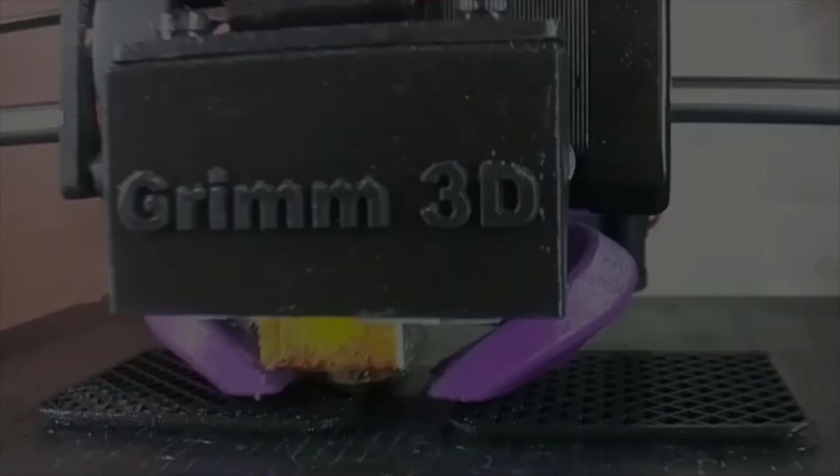So as you can see, this lighting fixture cover here is actually pretty brittle. It's been breaking quite a bit lately. I really don't want to look all over town for a new piece of plastic, and I'm not even sure that it would fit. This is pretty old, it came with the house, so it's been here a while, and it's had plenty of time to degrade and get very brittle. So today we are going to redesign this and print it out of some clear PETG, so stay with me for the step-by-step.

So I've taken the plastic out. This is actually a recessed can style of light, and so this ring has the little clips here that hold it up into the ceiling. I really want to be able to diffuse the light that's up in there and make it a little bit softer. So I'm thinking some clear PETG will do the job for us.

And I want it to be kind of strong, so PETG works with that as well. I think it's going to be a pretty easy redesign, I'm just going to have to take some measurements. Hopefully I'll be able to print it on the bed this way, and the only thing I really have to worry about is the height here, the diameter here, and then this little ridge that holds this plastic piece in the recessed lighting ring. So let's get going.

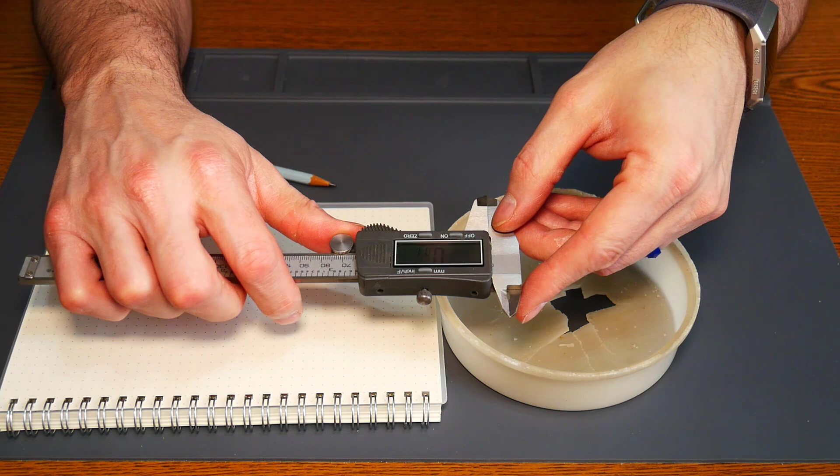And I have my piece here that I want to recreate, and this is a fairly cheap set of calipers from just Harbor Freight. I'm sure you can find them other places. So first of all, what I want to do is go ahead and draw a small representation, doesn't have to be big, but I can follow the dots on my pad. I want to draw a small representation of this from the side, like that. And then I'm going to go ahead and grab some measurements really quick.

So I want to know that this, where it meets the metal ring, is basically 128 millimeters. I'm going to add a little bit to that to make sure it fits where it's supposed to. This was originally kind of a loose fit in the metal ring, so I think if we go with 129 we should be all right. That's pretty clear. So right here we've got, and I'll try to draw this upside down for you,

129. All right, so then we've got our height here, which is not really critical, but I'm going to get it as close as I can just because I want to. So my height there is roughly 30 millimeters, so I'm going to go ahead and put this one at 30.

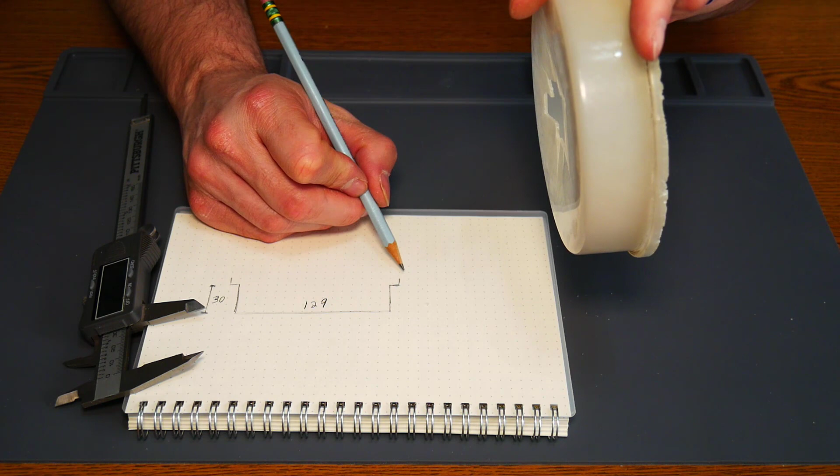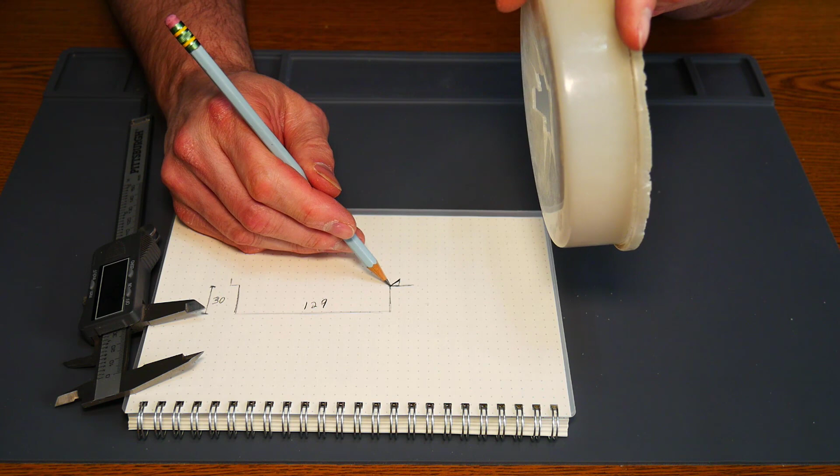And then the important part right here, this ridge, so that it hangs onto the metal ring - I think I am going to actually not print with a right angle like this, because that would require me to use supports, and I don't want to use supports on this one. I'm going to actually create that on a 45, so it should sit in the metal ring just the way it normally did, but then my printer will be able to print straight up through here and make something that looks maybe like that on the edge.

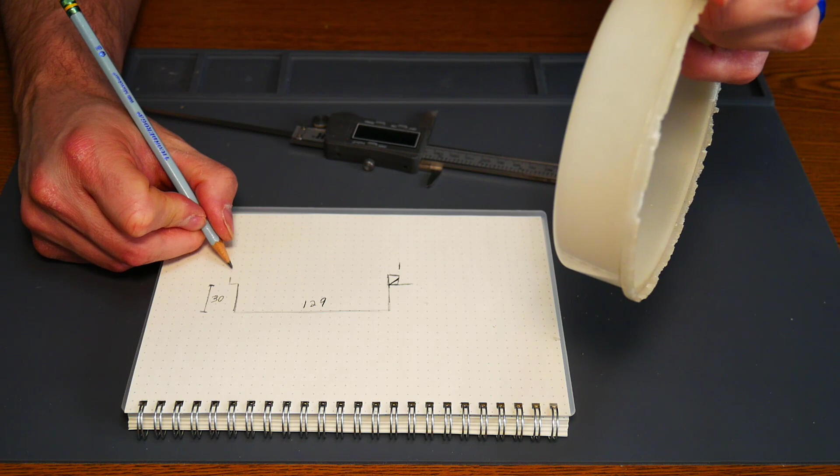So I am going to measure overall how wide this is. So I've got 135 millimeters. So from basically here to here, this direction, I have this at 135 millimeters, which means that this right here basically sticks out 3 millimeters.

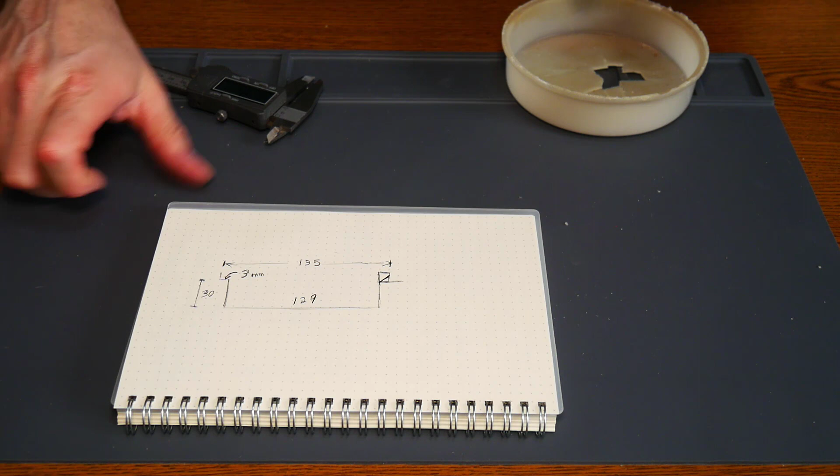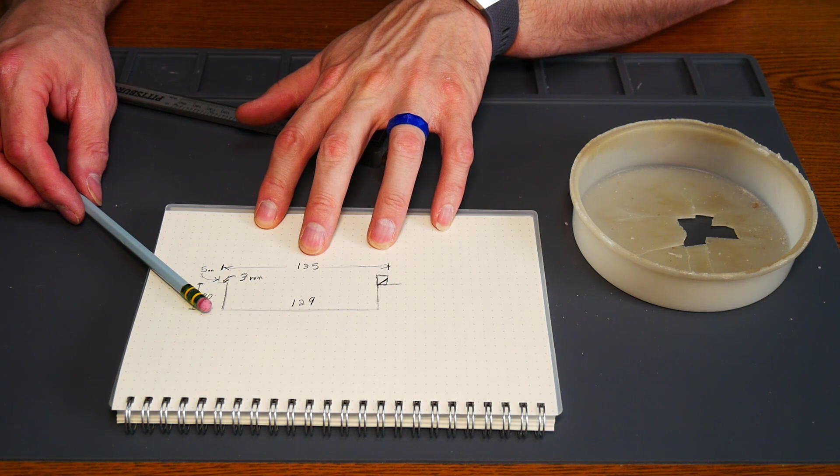And then the part here that raises up is not really that critical, but it comes up basically, so this right here is basically 5 millimeters. So now that we have some basic drawing down, this basic idea of what we're doing, let's go ahead and get over to the computer and start designing it.

So here I have a new file in my DesignSpark Mechanical. I'm going to go ahead and start working with some circles. I am going to start with the bottom of this light fixture object that I'm creating. I am going to put a little bit of taper between the very bottom of it and the top where it goes into the metal ring.

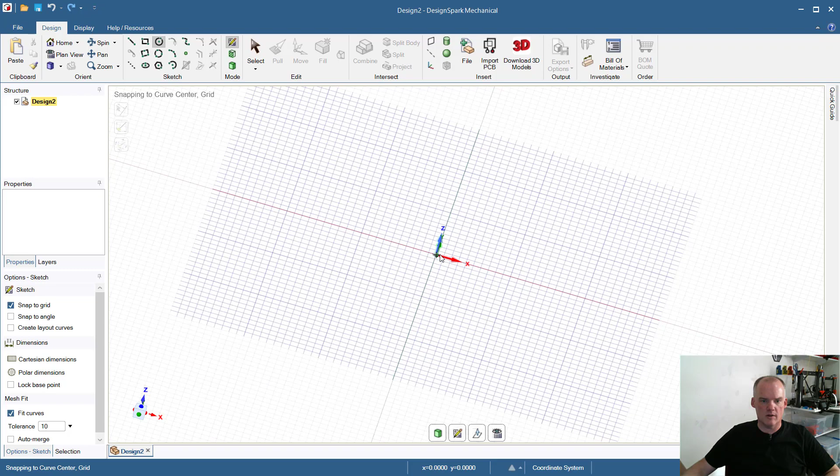So I'm going to start with a circle of 129 millimeters, just like I had on my paper. And then, remember, this is the outside diameter. I need to have an inside diameter. So I think that I'll probably make this 2 millimeters thick all the way around. So I'm going to subtract 4 from 129. That's 2 for each side. And I'm going to go with 125.

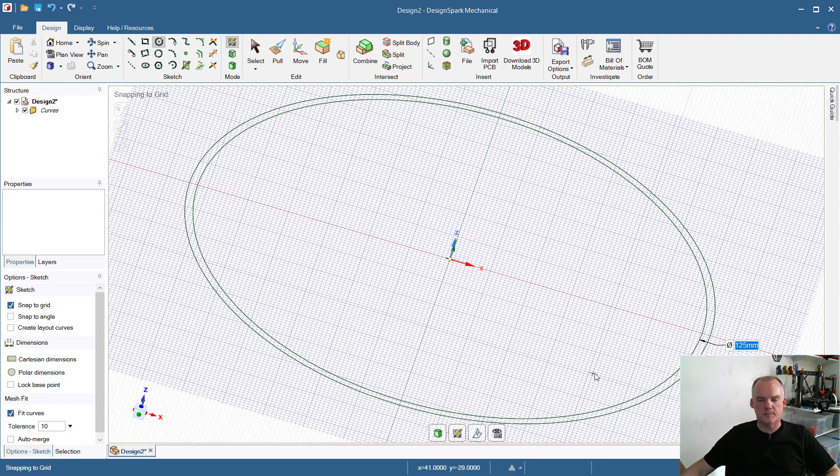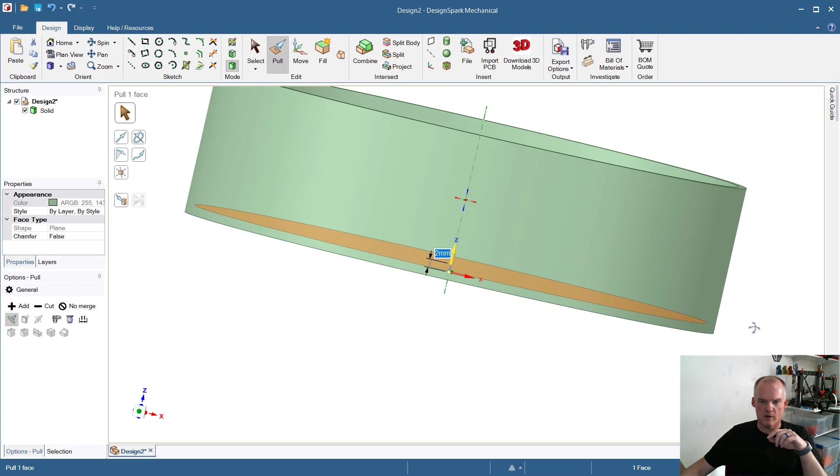So there's 2 millimeters. And then I am going to go ahead and pull this outside up to my full height of 35 millimeters. And I'm going to pull this bottom part up to 2 millimeters so that I have what I'm looking for in the 2 millimeter thickness all the way around.

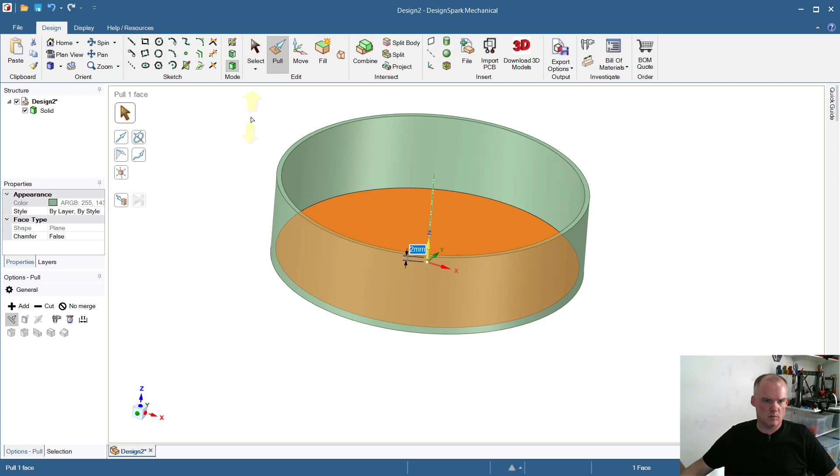Then I need to create my ridge that hangs this into the metal ring. So I'm going to go ahead and create another circle. I'm going to create it on this plane up here. From the center out, it needs to be 135 millimeters, if you remember our measurement. So there's a 3 millimeter overhang on either side.

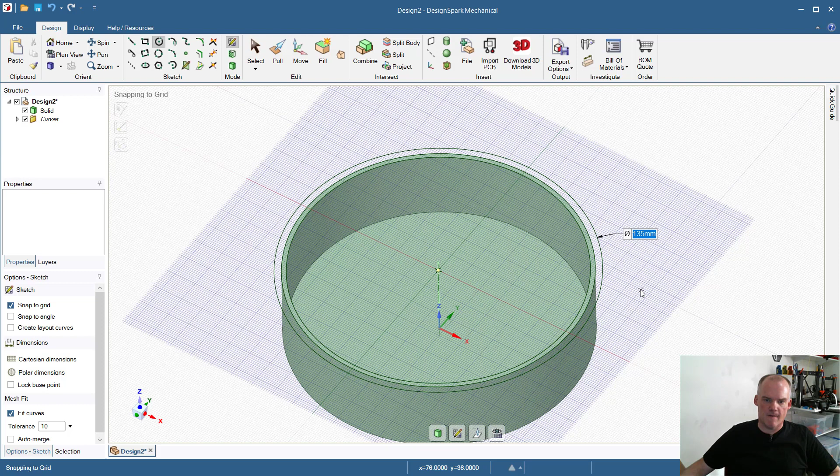And then this is going to get pulled. I'm going to pull this one and this one up 5 millimeters. I don't need the center one, so I'm going to delete it.

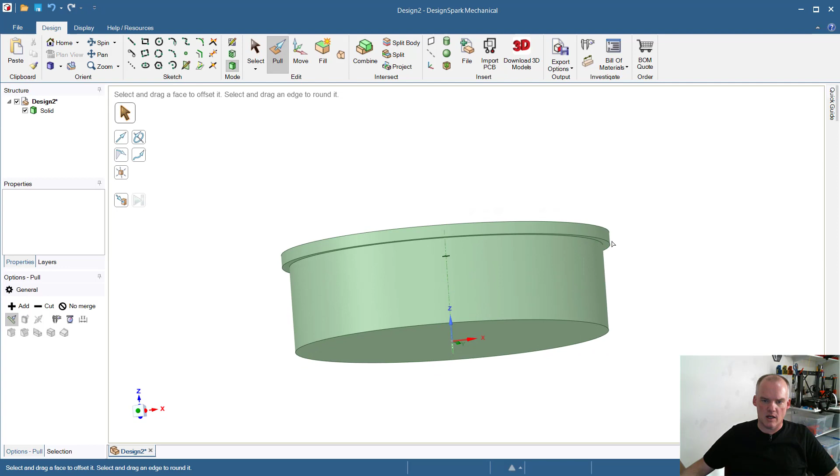And then I am going to create a bevel right here so that I can be able to print this without support. So I've got a 45-degree bevel right there. I think my printer can probably handle that.

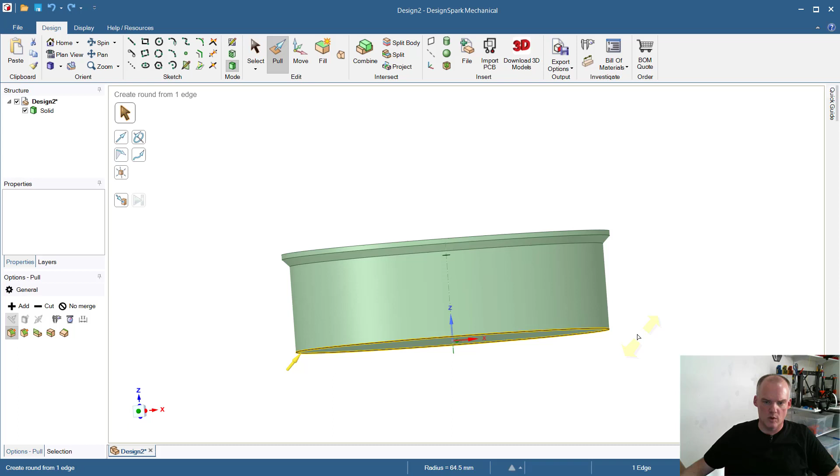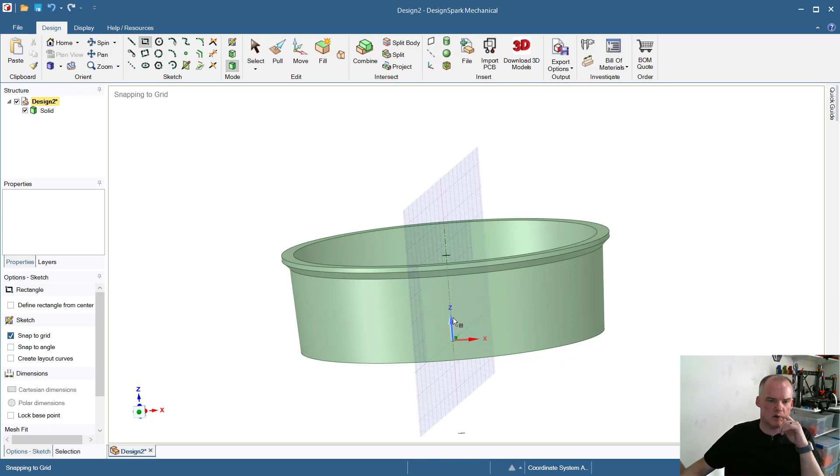I am going to then taper this edge, which you do with the pivot edge function over here. I'm going to pull this in probably about 2 millimeters, which it has not pulled in the inside, my 2 millimeters, so I'm going to need to do that.

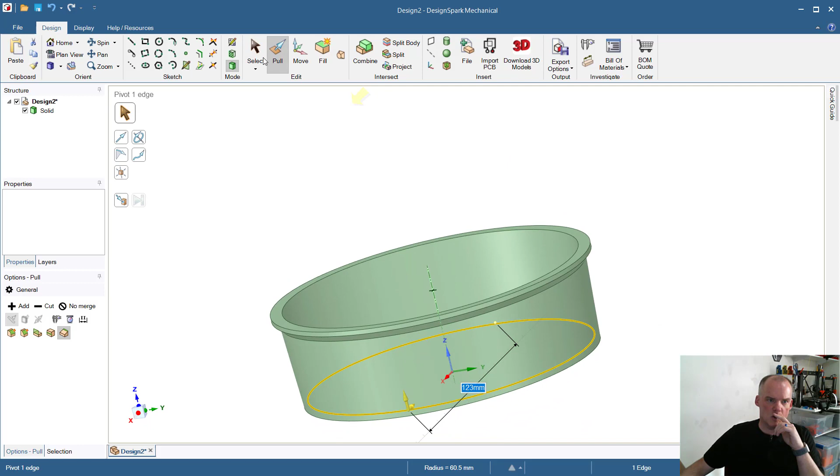So I'm going to go with a pull on the inside, taper that, and I'm going to pull it in 2 millimeters to match. One more check on the cross section by setting up my drawing plane. And there I have basically the outline that I want to create out of PETG.

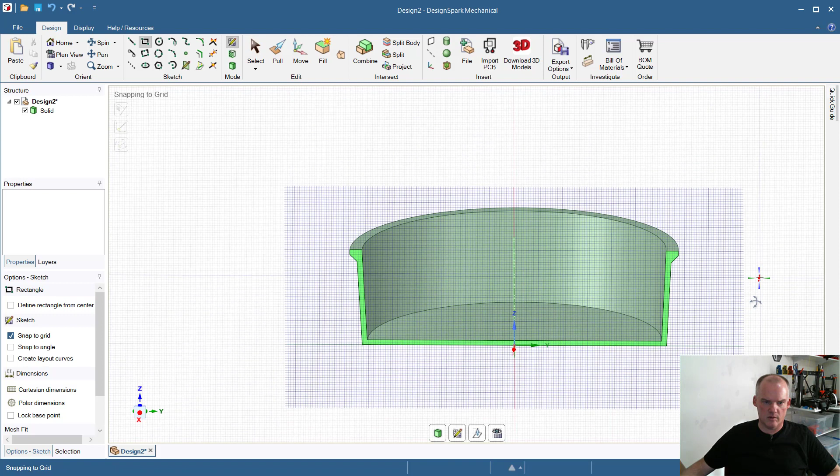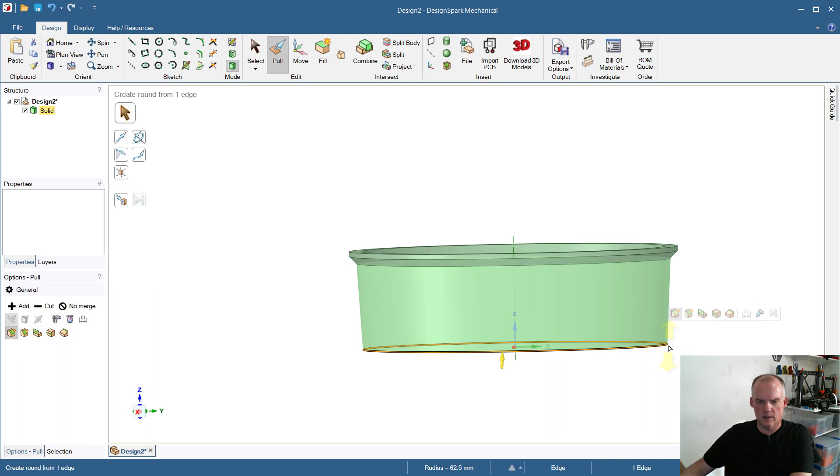I do think that I will dress this up just a bit on the bottom by doing a pull on the bottom and creating a rounded edge there of maybe 3 millimeters, and then a matching one out here, which in order to match that we'll probably have to go with 4 millimeters.

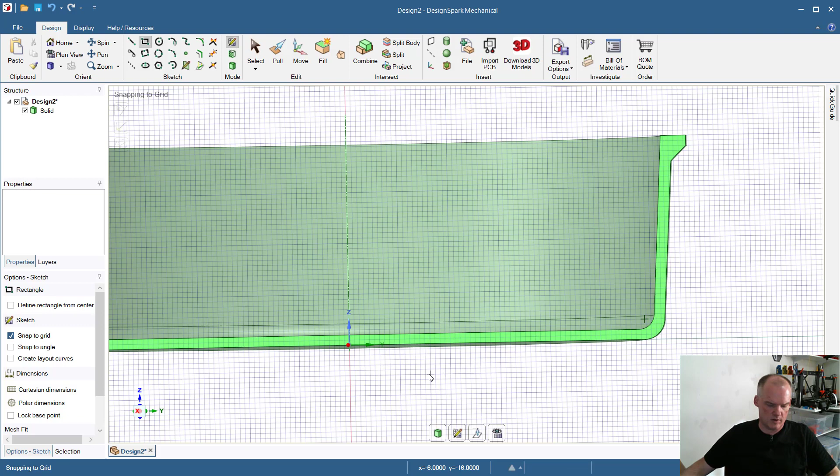And then I'm going to check my cross section again to make sure that right here on the edge I have a nice even curve. We are still seeing 2 millimeters worth of thickness to go ahead and print this out of clear PETG.

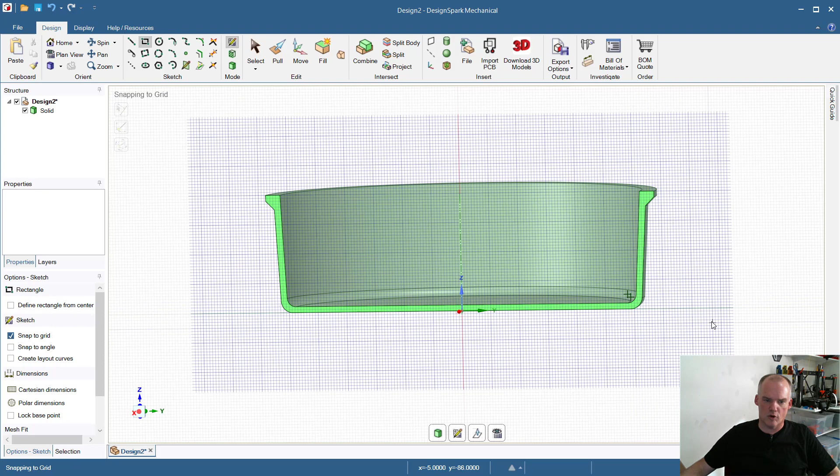I'm going to save this file, and then I'll have to of course save it as an STL. I have my DesignSpark Mechanical set for fine grain or fine detail STL, so that should be pretty easy. I may actually have to turn on supports to get this curve done correctly, but I'm not super concerned about that because the support shouldn't end up anywhere else except on this curve to help that stay curvy. So there you have it.

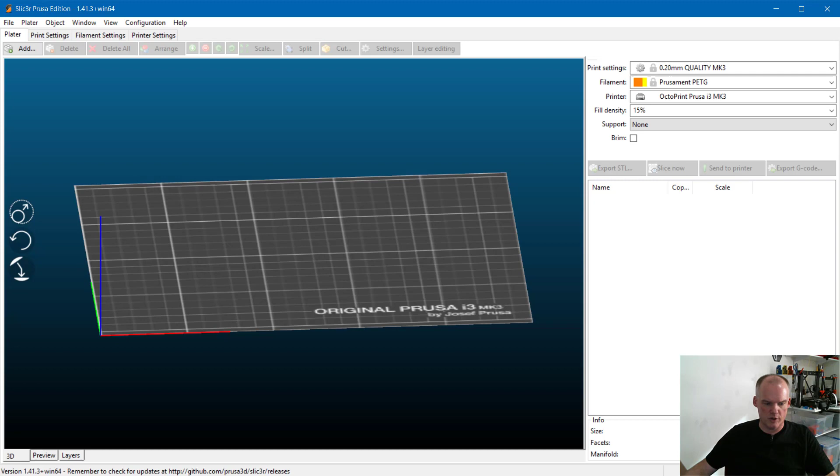That's my design process. It seems to look pretty good, pretty simple. Should do just fine. Here I have opened Slic3r or Slicer PE Prusa Edition. Since I already have the clear PETG already loaded in the Prusa, I'm going to go ahead and print my file out on the Prusa, which should do a pretty good job. I'm going to go ahead and bring in my STL. There it is. Fits on the bed just fine.

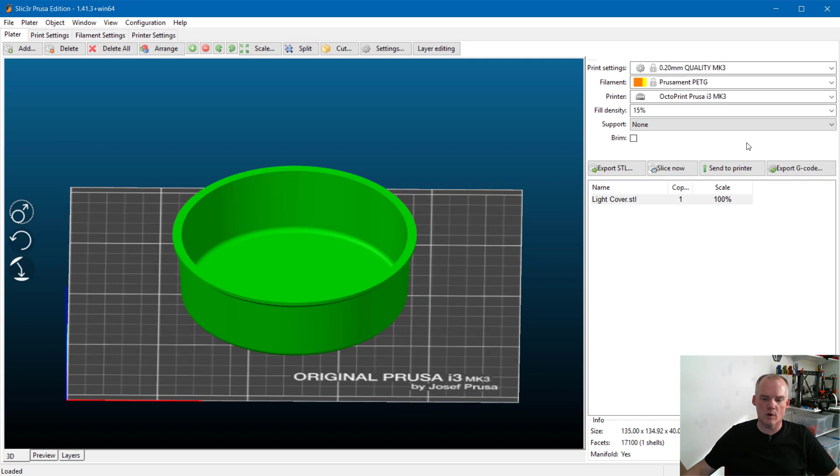Looks pretty fantastic. I'm going to go ahead and set this up with my quality being 0.2 millimeter, which should be fine. I am using the Prusament PETG profile, which has worked really well for me, even though the PETG I'm using is the Maker series from Maker Geeks.

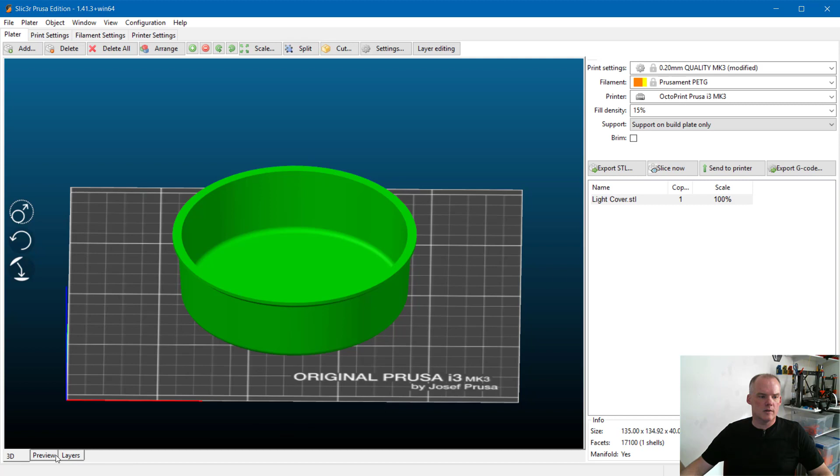This Prusament PETG profile has been doing a pretty good job for me. I am going to turn on supports to the build plate only and do a preliminary slice, see what I get. Over to the preview. As I suspected, it did not put any supports to my 45-degree angle, even with the basic settings, but it did throw some supports down at the bottom. Let's take a look at those a little bit more closely.

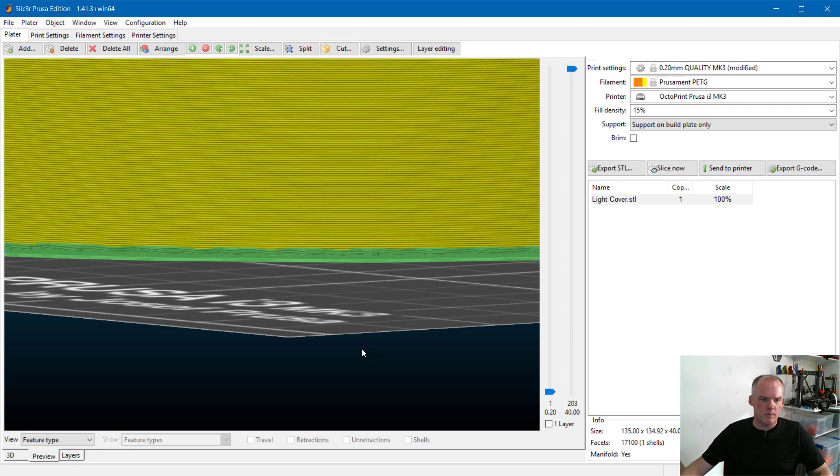This is just the default profile on the supports. And it actually looks like it's not throwing down a whole lot of support. So far I'm pretty happy with that. I'm just going to go ahead and check my other settings.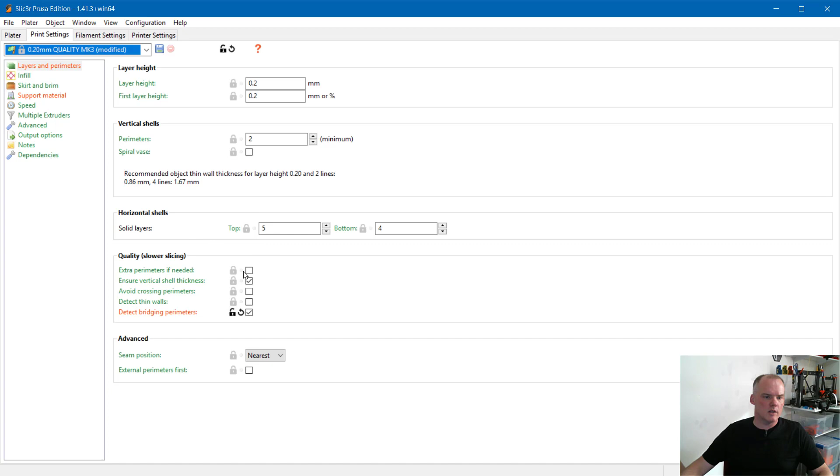0.2, 2 perimeters is fine. Solid layers, infill, 15% I'm sure will work just fine. Skirt, I always like it to do 2 loops to prime that, and if I have it do skirt height of 2 layers, it's pretty easy to just pick off with your fingernail when it's cooled off. Support material, yes, I'm good with that.

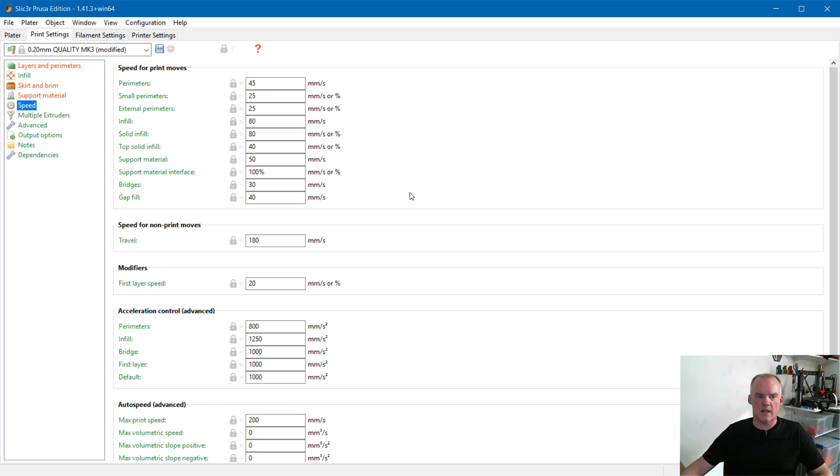The speeds are okay. I did stick with the 0.2 millimeter quality, which is kind of new in the newer versions of Prusa edition here. So it prints a little bit slower, but I'm expecting and hoping that it will give me a really nice outer shell. That would be fantastic.

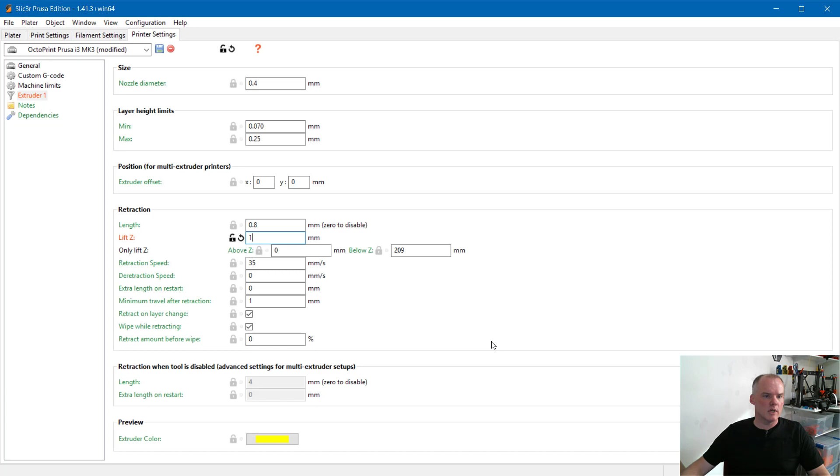I really need, these are my heat settings. Those are just standard. I haven't changed any of these. But I do need for the Octoprint to make sure that my lift on Z is set for 1 because that's what Octoprint is expecting. It really doesn't seem to hurt me too bad to change that. It does create maybe a little bit extra stringing, but I'm just going to take care of that with a heat gun later, so it's not a big deal.

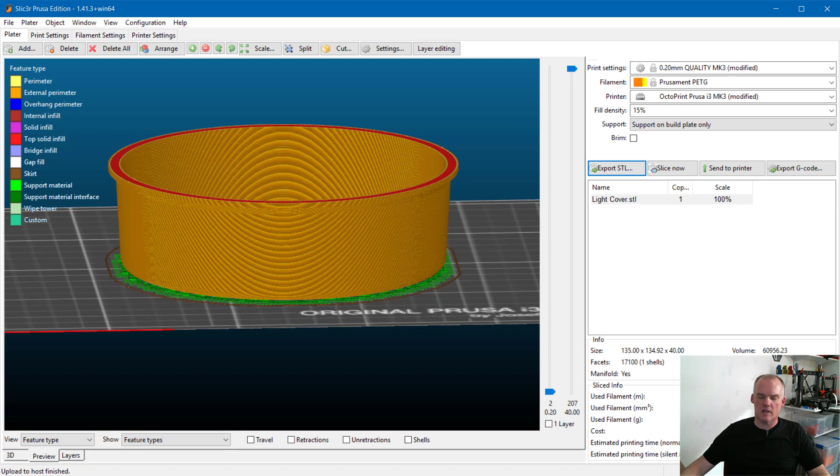So yeah, there I have it. I am going to go ahead and I'm going to send this to Prusa Diffusa. I'll see you on the printer. Looks like this is going to take about 7 hours to print. Not too bad.

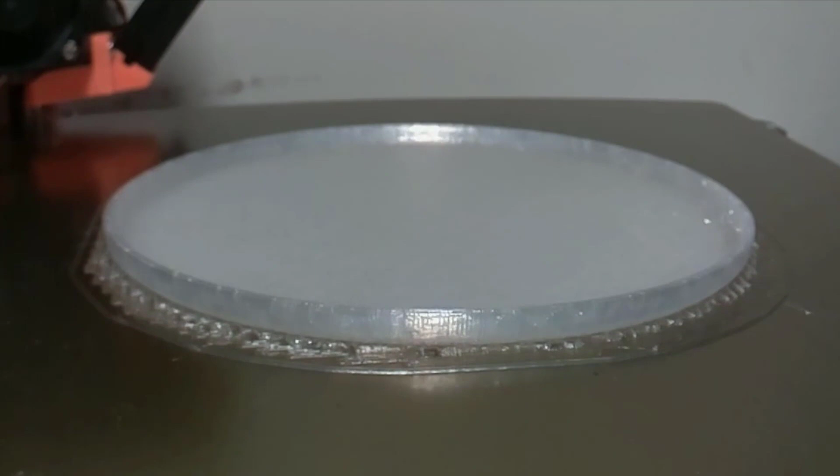Well, there you have it. A little bit of stringing. I did cut the supports off the bottom there, but I think it looks pretty nice. Here's the old one. There's the new one. Pretty easy, pretty simple build, pretty simple design.

But I want to check 2 things before we go. Number 1, I want to check what a light looks like behind it. So I just happen to have a bulb here that's about the same style of bulb that goes in this light. Okay, there it's on. We'll see what this looks like behind there. Pretty nice, pretty soft light.

Pretty easy to handle. Okay, same light. I don't know, maybe we can't see this with the hole in it, but same light underneath the original. That's the original light cover. That's the new light cover. So, not a big difference, not too bad. Looks pretty nice.

Last thing I want to check is to see that this fits in the metal frame that holds it to the ceiling, to the can. I just set it in there, weasel it in, and look at that. Absolutely beautiful. What a deal. It fits in there pretty decent. A little bit of slop, that's okay. I can bend those little metal tabs down to hold it in if I want. They should be right on top of it. It should be just fine. Absolutely beautiful.